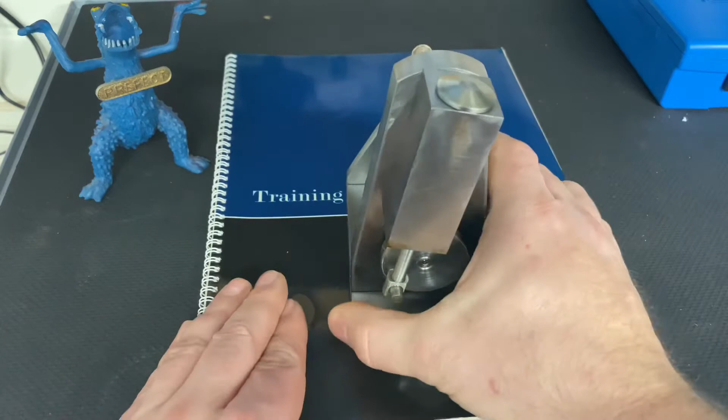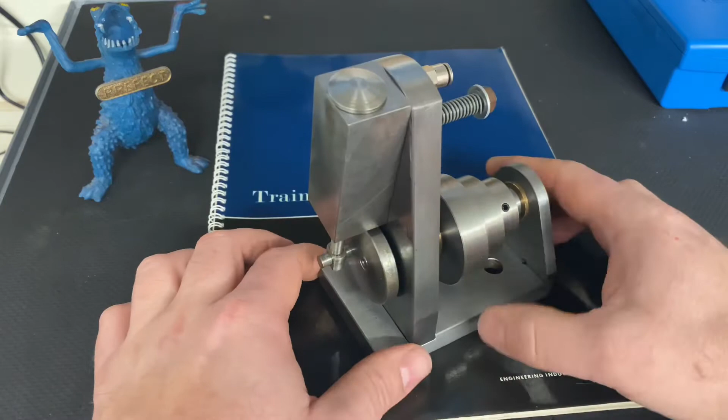But first, I wanted to insert one of my earlier videos, which was based on this air engine. So that video will follow. It's just a little video where I refurbished this air engine that I made when I was an apprentice. It'll run on compressed air or steam, and I dug this out. It was in a right state, so anyway, there's that video which shows just some footage of me refurbishing various bits of this, and I'll follow up with this one. I'll get this running. I need to power up with my compressor.

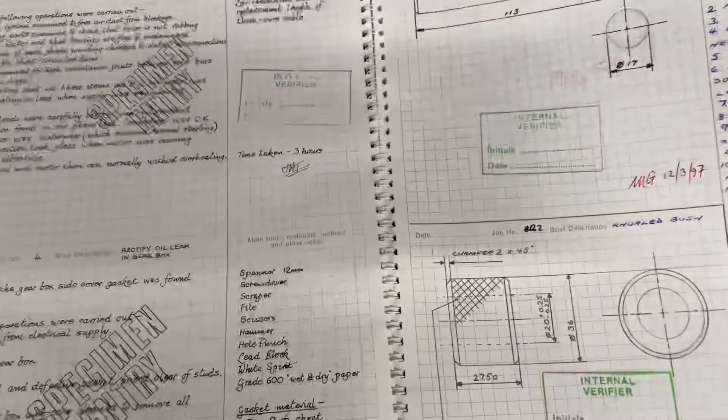But anyway, I was in the loft this morning and I thought I'd show you this. Move him out of the way. So this is a training logbook, and this is from when I was an apprentice in the 90s. So anyway, it was interesting having a look through this. That's just a sample page, that's not my work. The reason why I thought it might be interesting is because I've got the plans in here for making the air engine, and plus other various little things.

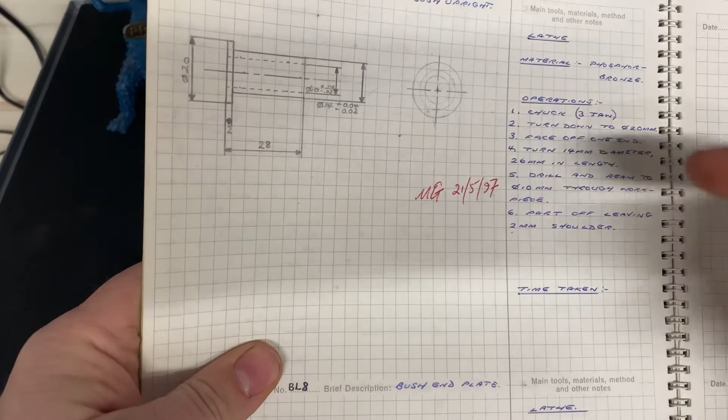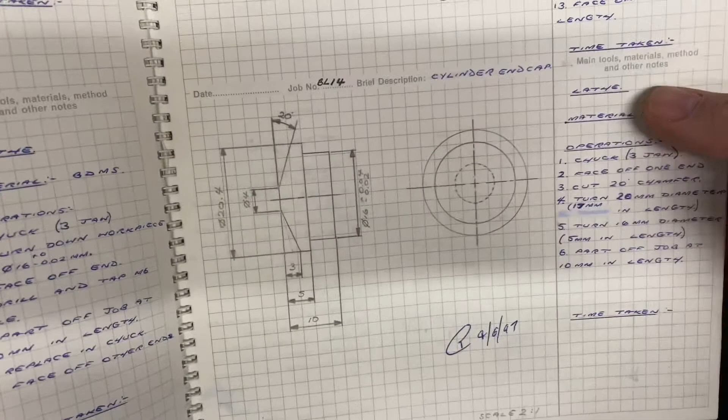So there's a drawing of a scriber that I made. That's the main shaft for the air engine. That's the bearing housing, flywheel, and what I've got in here is a breakdown of the operations that I used to machine them. So there's the bush, another bush, crank pin, there's a crank, conrod, piston, there's the cap that goes on the top of the cylinder, there's the cylinder.

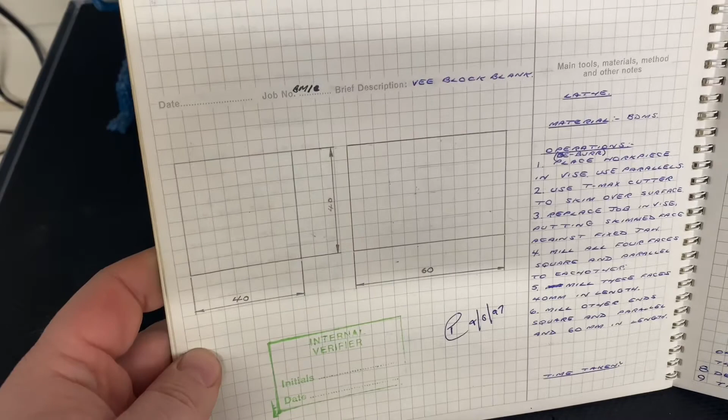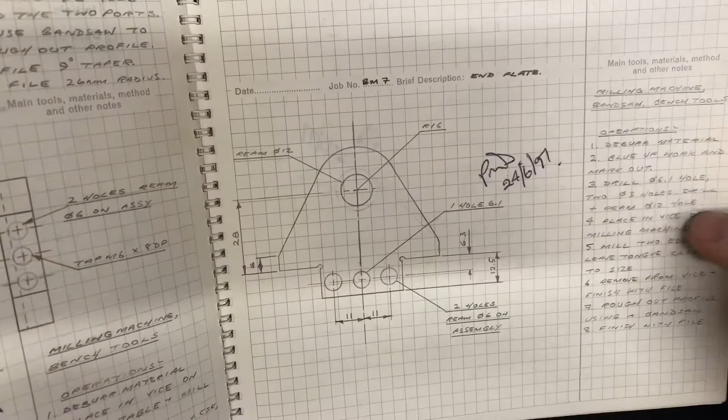What's that? Oh yeah, that's the kind of like the, what's that called? Swivel pin. So that's what the cylinder pivots about. I think that's just a, oh yeah, V-block blank. I made a V-block, T-nut, V-block. Not sure what happened to some of these jobs. So there's one of the other parts. So that's the upright for the air engine, and the base plate there. So hopefully these are recognisable from what you've seen as a physical thing. There's the end plate, and just the operations continue from the previous part. There's the assembly of it.

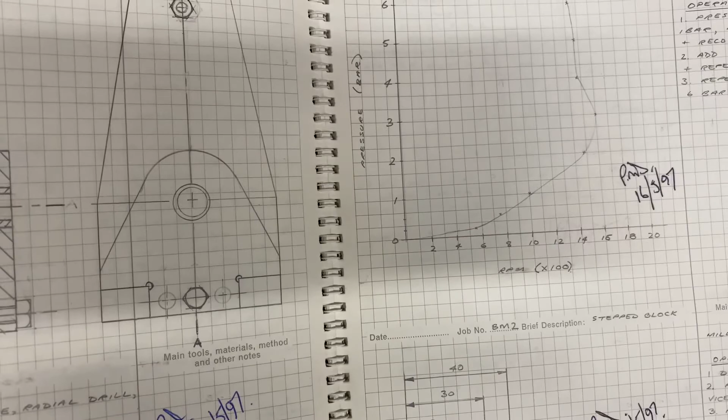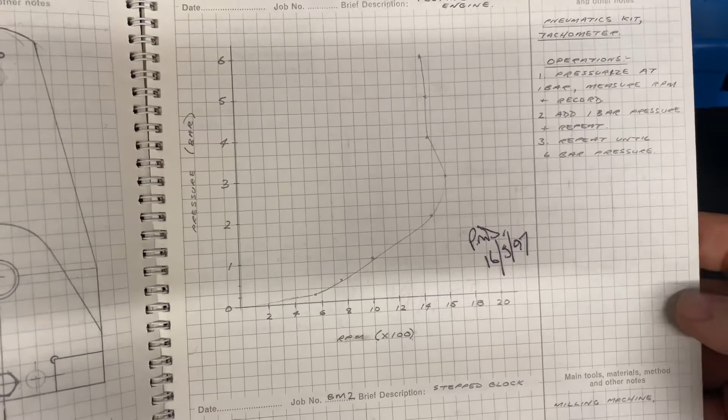So I think I commented in the other video, which you'll see following up, when I was looking at the workmanship of this engine, it was definitely, you know, apprentice grade. I mean, it worked fine, but yeah, you could see little bits and bobs that perhaps you'd do a little bit better with a bit more experience.

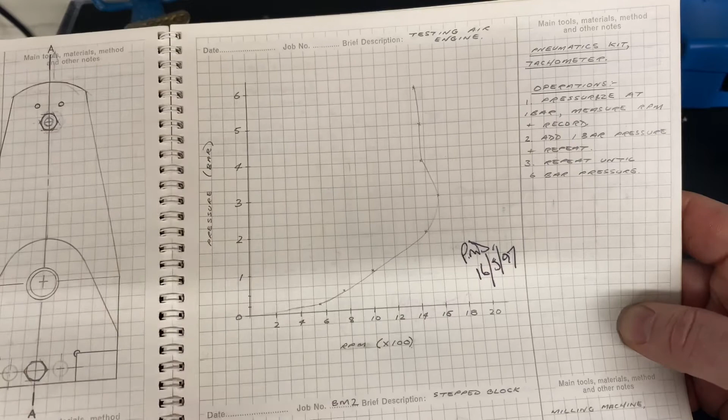This chart was a chart to show engine speed against air pressure, and I probably should have flipped these axes around the other way so that the curve would be a bit easier to read. So the curve would go up there like that, it'd come up to a peak and then drop off. So this shows here that the peak RPM was at 3 bar, and it reached 1500 RPM.

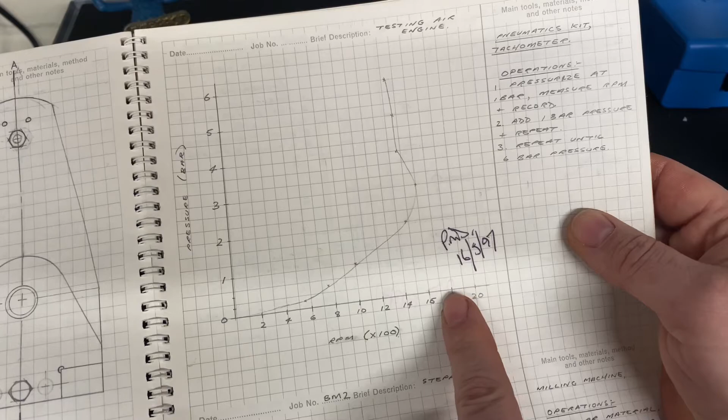Stepped block. Here's a little clamp, which I've still got. This is for clamping either screws or threaded bar in a vise that you want to cut down, to avoid damaging the threads. Here's a little toolbox.

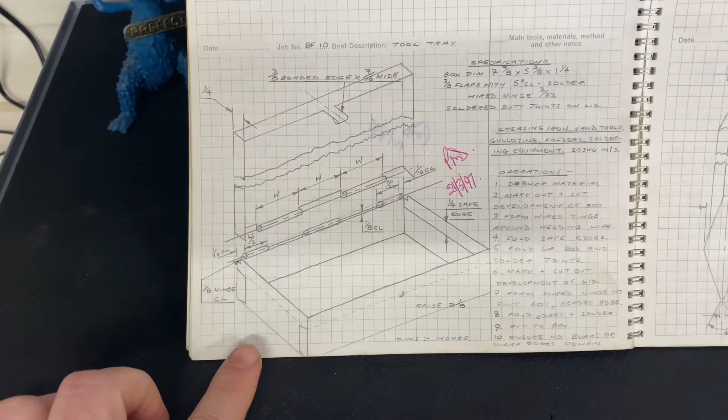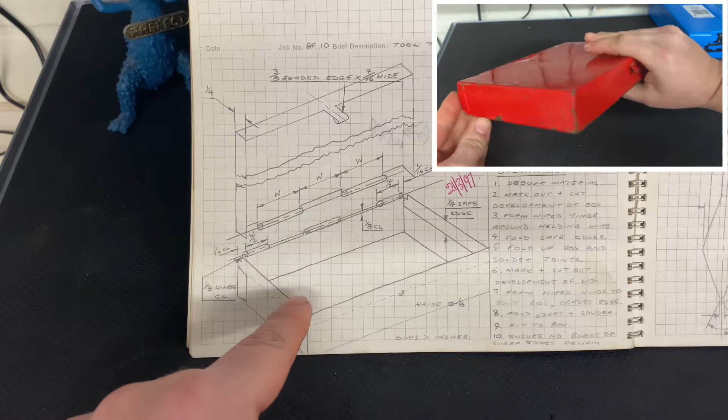Now, I've still got this toolbox, and I'll insert a picture of it because I keep some odd drills and stuff in it now. But the base section was all made out of one sheet, and I had to make a piano hinge as well. Instead of riveting or spot welding a piano hinge on, we had to make the piano hinge as part of the lid and the box. So I'll insert a little picture of that, and I still use it to this day.

Chisels, still got these chisels. They've done some work for me, and that's it pretty much. Yeah, the book's not full, but I think as a first year apprentice, those are some of the jobs that I did.

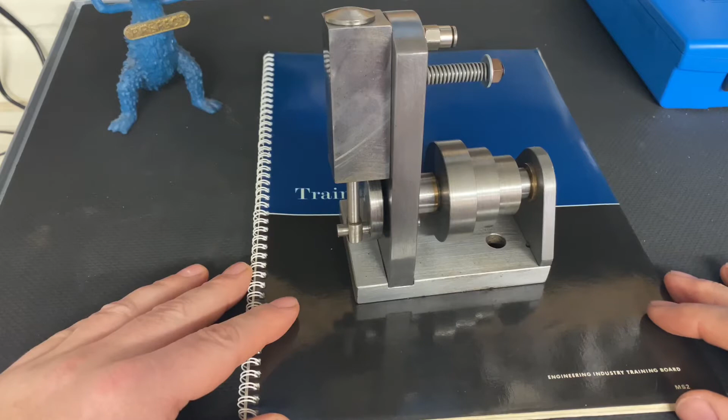Okay, so I'll cut here and I'll insert the other video for you to see, and then I'll bring you back after that, because I've got a little bit more to say to you. Okay, see you soon.

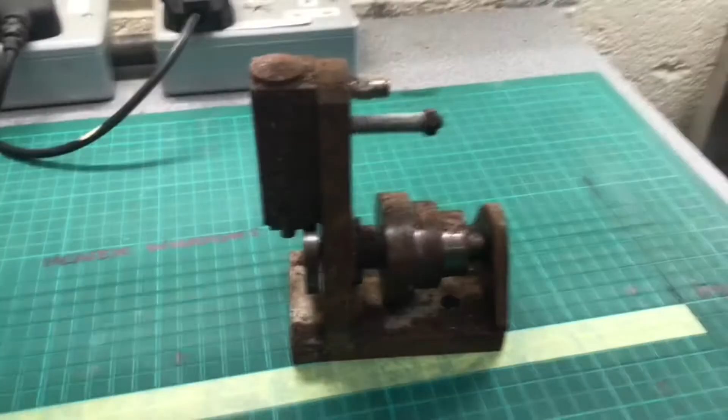I thought I'd do a quick video on this little air engine, but it's looking pretty sorry for itself. Looks to be absolutely covered in rust and gunk, which is a real shame. So I thought I'd do a video about this because it's a steam engine really, but I only ever ran it on compressed air through this port here, and there should be an exhaust port there next to it.

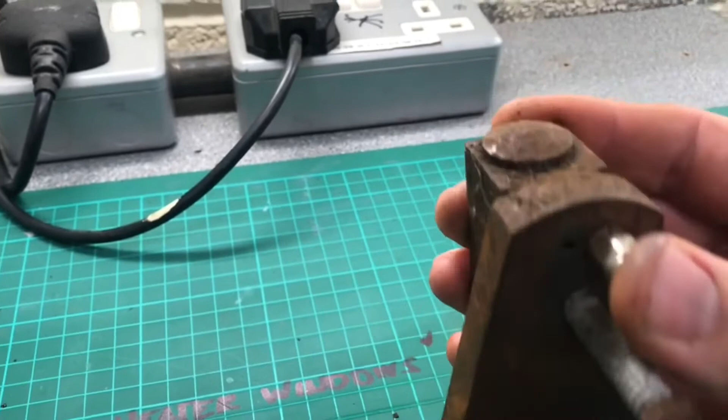And the idea is that you could run this on compressed air or steam, and the cylinder pivots from side to side like that as the crank rotates. There's a flywheel on the back, and it pivots about this shaft here.

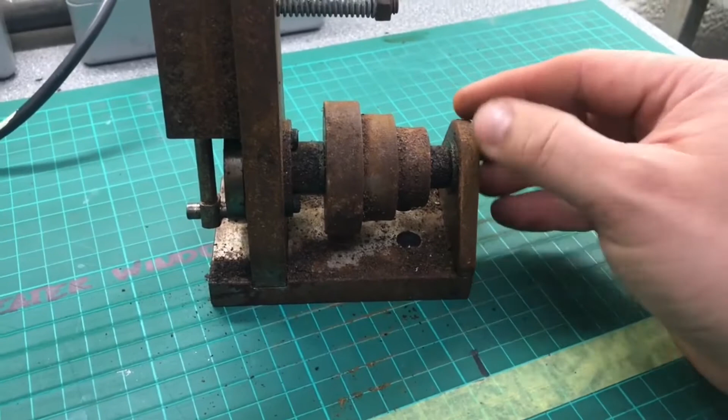So I made this engine when I was an apprentice, and well, shame on me really for allowing it to get to this condition. But in my defence, it was on a nice clean bench in my shed, and I had an infestation of ivy growing in the shed, and it released all these spores and crap all over it. So most of this isn't actually horrendous rust like it appears to be. Most of it is just crap off the ivy.

And so the idea of this video is to show you the before really. So it's looking pretty sad, pretty rusty. Internally it's all well oiled, the journals are okay. There's a phosphor bronze bush in there, and there's one in here, and inside the cylinder should be pretty good because that's always oiled.

But in outline, there's a step shaft in there. Flywheel locks on with a grub screw. There's a spigot on the end of this shaft which fits into that bush, which is pressed into this end cap. This upright piece fits into a slot. That was one of the only features on the base plate that I was allowed to machine. Everything else had to be filed.

Obviously I drilled the holes, and the holes on the upright section, but the sides and the faces, and this radius at the top, had to be filed round. These had to be filed flat and to the right angles, like that. The cylinder was milled square, the hole was turned, the end cap was turned. It's got a little tapered cap with a flat on the top.

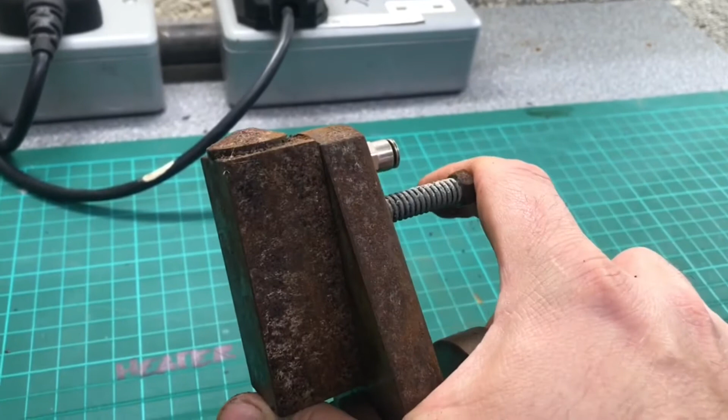It has a spigot which is a press fit into there, and then there's a little crank wheel here with a pin that's threaded into there, conrod, screws into a piston, and they're the main bits really. Oh, and this little bearing housing here which has a phosphor bronze bush pressed into it.

So the next part of this video will be a time lapse of me stripping it down and then cleaning all the parts, and I'll probably put most of these parts up into the machine to give them a good polish and bring them back to their former glory, and then hopefully at the end we can have it running. Right, I'll be right back shortly.

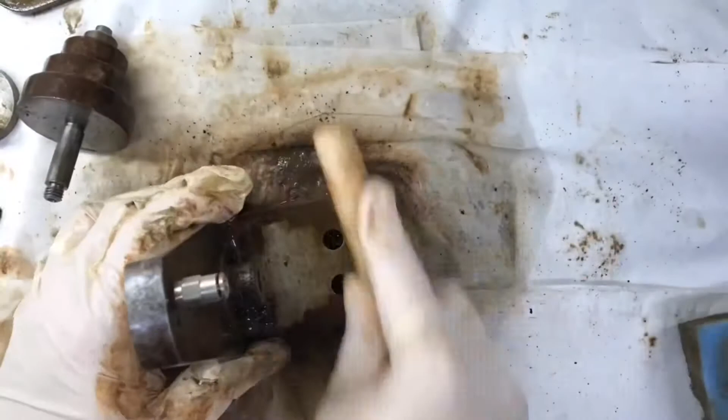Well, that's all the parts cleaned up. I gave them a good scrub in WD-40 to begin with, as you saw on that little time-lapse bit. And then the flat parts I draw filed just to get them back, get all the crap off them. And then some of the round parts I put up into the lathe and just cleaned them up, so they're looking like new now.

And on this part here I actually diamond lapped, so that's got a nice finish on it. It doesn't need it, but I did it anyway. It's been interesting actually to have a look at these parts, to have a look at my workmanship as an apprentice. I can definitely tell that some parts of them are definitely apprentice-esque in terms of the quality, and I've kind of left it that way really, just for it to be authentic.

So if I was going to make all of these parts now, I'd like to think that I'd make them to a higher standard. It's just some things I did improve, like I've put little break edge chamfers around the holes, which I left them sharp when I was 16. That's when I did these. It's interesting to see all these parts though. You know, that groove in there, I think that groove was milled. I was allowed to mill that groove.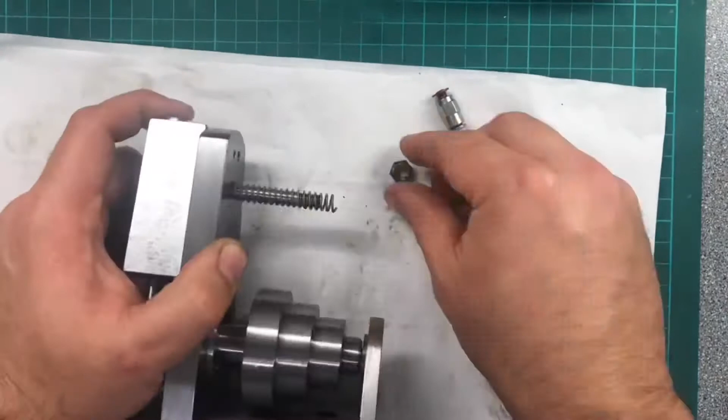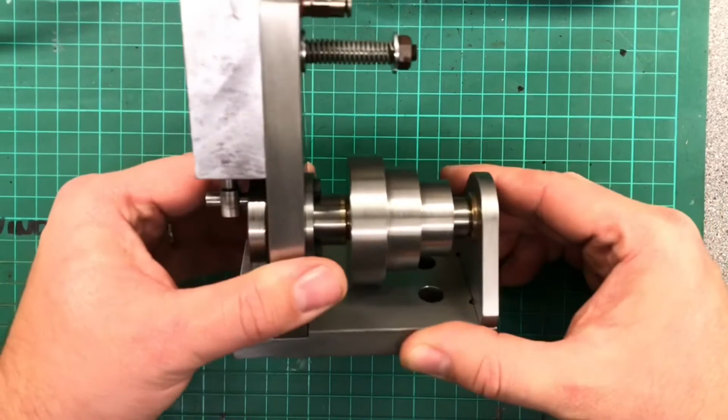There we go. So here it is reassembled. It's all cleaned up. It's been interesting to have a look at this. Just looking at an old project that I did many years ago, and I've tried to leave it as authentic as possible, in that I haven't remachined it to make it more accurate or anything like that. It's exactly how it was, pretty much, as when I originally made it, apart from just giving it a little fettle and a clean up here and there. So it's looking much better.

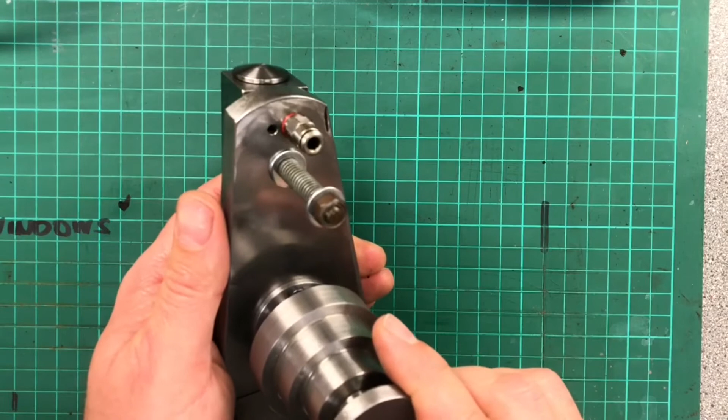So this is, well, it's a design that one of the college tutors came up with, so we ran these on compressed air when we tested them after building them, and this one ran fine, but I've not had it running yet, so it'll be interesting to plumb it up to some compressed air and see how it runs. If I stop talking for a minute,

So you can hear on the compression stroke, it's pushing the air out of this exhaust port, and because it's quite small in diameter, you can hear it whistle. So that means that there's a good seal between the interface between this cylinder block and this face here. So they're both nice and flat. They're mating with each other nicely, and there's a good seal. There's a good fit around the piston as well. So it sounds like it's working. It sounds like it will work.

One of the only improvements really that I did make was to reduce the amount of end float between these two phosphor bronze bushes here, because I did face them off a little bit, so I took about 0.1 of a mil off each bush just to clean the faces up. So that caused the shaft to have a bit of end float. So I've fixed that now. So that's more solid. So that doesn't rattle back and forth in there now. It's not too tight, it's just right. So it's just got about 20 microns of clearance along the axis of that shaft.

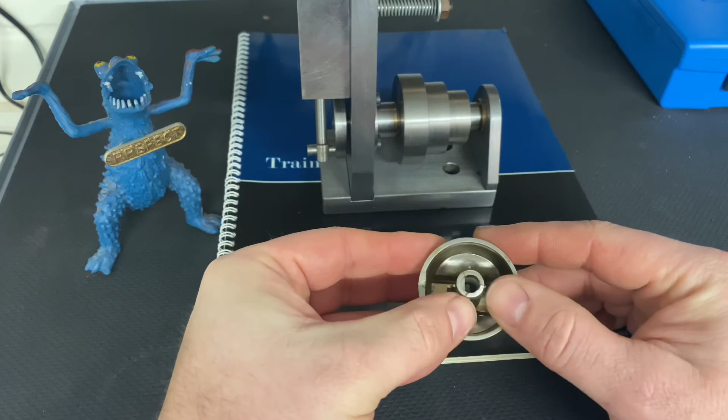Anyway, these are about £13 each to buy, and there's 8 of them on the front there, so you're talking a decent amount of money just to replace those, and there's a good chance that they'll just break anyway, just like these have. So I've ordered some aluminium, so I'm going to make some. We're going to increase the diameter on here, and I'll use a grub screw instead of the D form in there, and that'll just bear down on the flat on the shaft.

And then there'll be some milling to put these little flaps on here with a nice rad, and then I'll machine a nice bevel around it, so it'll look similar to this. It won't be exactly the same because this is kind of tapered on the edges, so it'll be similar. I might put the compound slide back on and turn some taper sections on it, just to add a bit more interest to it. And then yeah, I'll machine this little groove in here as well. So yeah, it should be an interesting little job, that. And there's 8 of those, so that'll be an upcoming video as well.